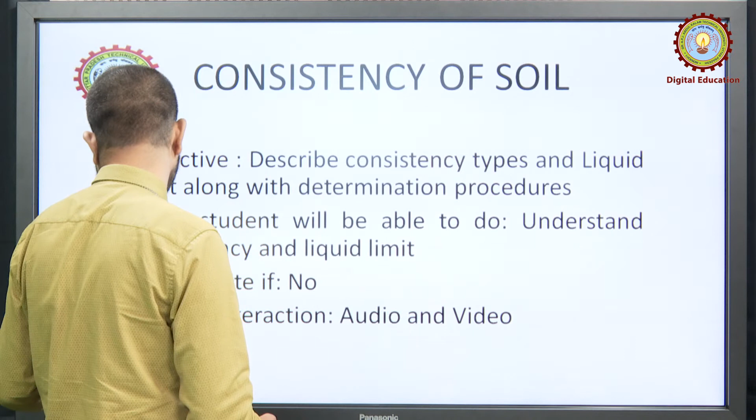Consistency of soil we will be doing today, particularly the liquid limit. What is the consistency types and all, we will be discussing today. So let us see, what is consistency of soil?

Consistency is defined as a term which is used to describe the degree of firmness of a soil in a qualitative manner, by using descriptions such as soft, medium, firm, stiff, hard. Meaning, if a soil is given to you and someone asks what is the consistency, then it means how soft or how lean or how hard the soil is, or if it is flowing like a fluid or it is very stiff.

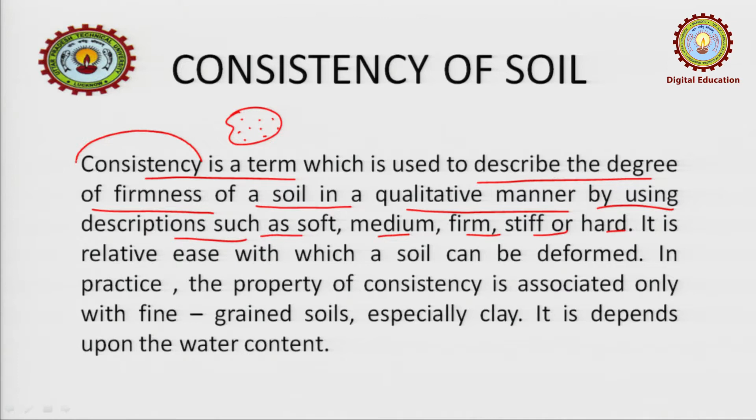You have to define that physical behavior of the soil, that is the consistency. So it is the relative ease with which a soil can be deformed. Obviously, if the soil has a high percentage of water, then it will have a liquid behavior. So liquid behavior means it will be easily deformed, it can flow as well.

In another case, suppose if the soil is stiff, what does stiff mean? Stiff means it is hard, meaning it will have a shear strength, or it will have a strength, or you have to apply some energy to break it or to deform it. So that is your consistency.

In practice, the property of consistency is associated only with fine grained soil, especially clay. It depends upon the water content. I just told you that water content is a very peculiar dependent for the consistency of soil. Besides that, the discussion for consistency is mainly for the fine grained soil.

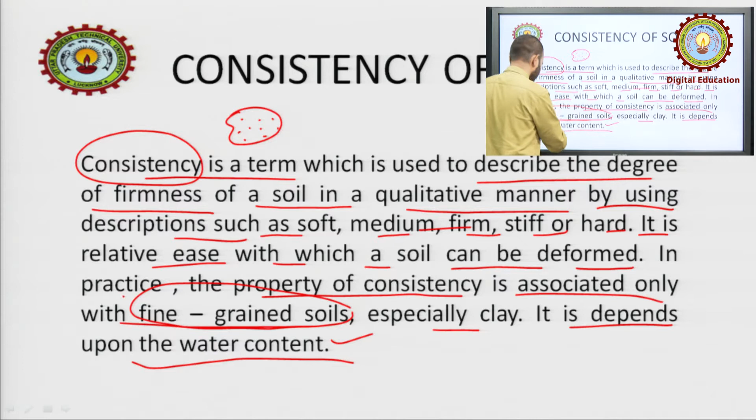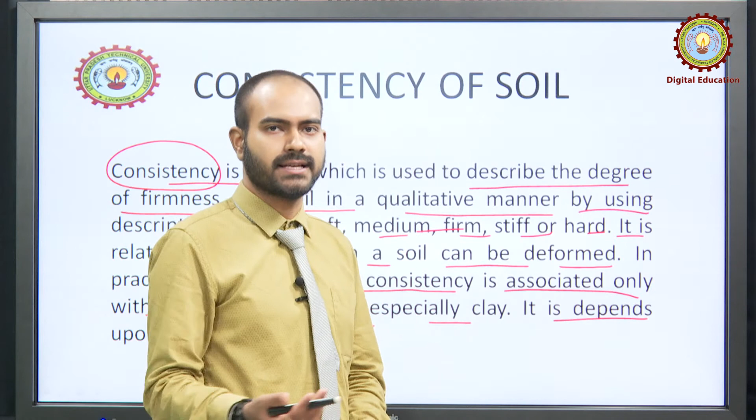Why fine grained soil? Because in coarse grain soil, such as boulders or small pebbles, they have a different property. They don't show cohesiveness or anything like that. Even though they are dry or wet, they will have their own property. They will be scattering here and there as if there is no medium, whether there is water or not, in both cases there will be no difference. So we will be mainly concerned with fine grained soil when talking about consistency.

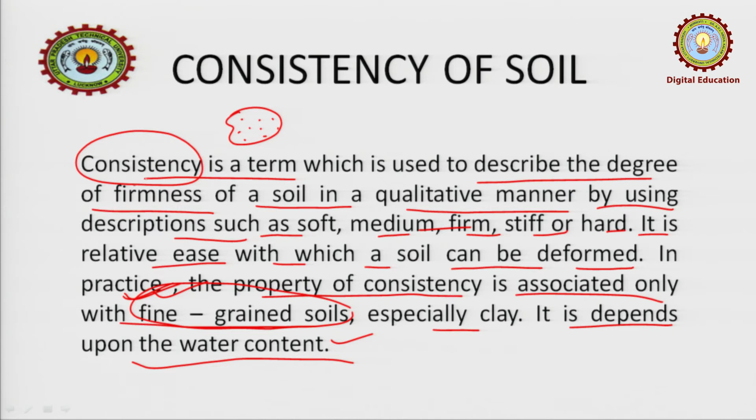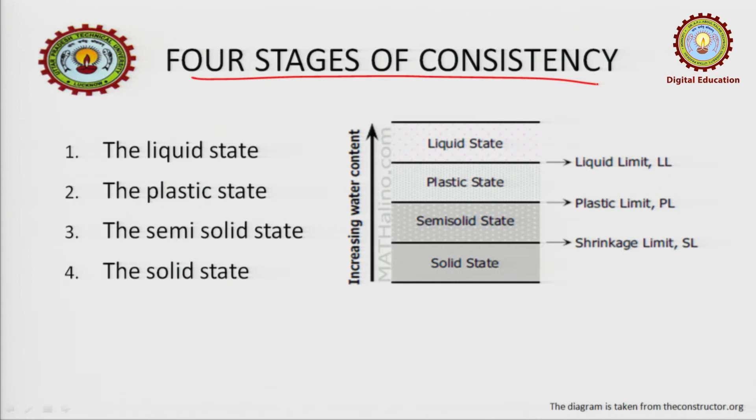Okay, let us move forward. Now, stages of consistency. This stages of consistency resembles the different parts or different stages or states of the soil which we will encounter. This was first given by Atterberg, who was a scientist. So he gave the stages of consistency.

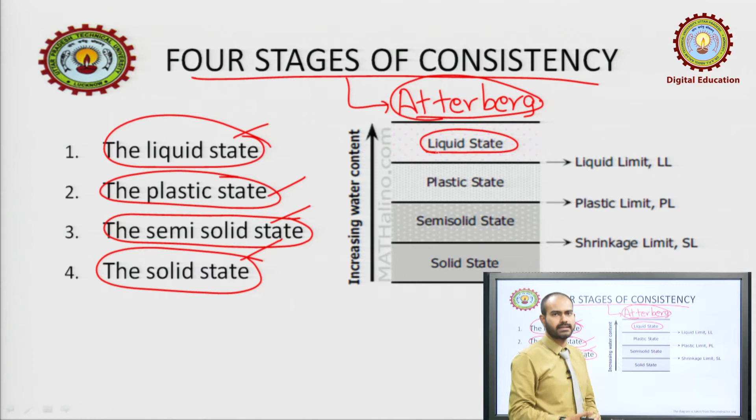He defined 4 stages for a general soil: liquid state, plastic, semi solid and solid. By name also you can judge what the liquid state is. In this diagram, you can see this is the increasing water content. In the liquid state there will be the highest percentage of water, meaning the soil will have little amount of soil particles and instead a large amount of liquid or water. This means the soil will flow, it will behave as a liquid.

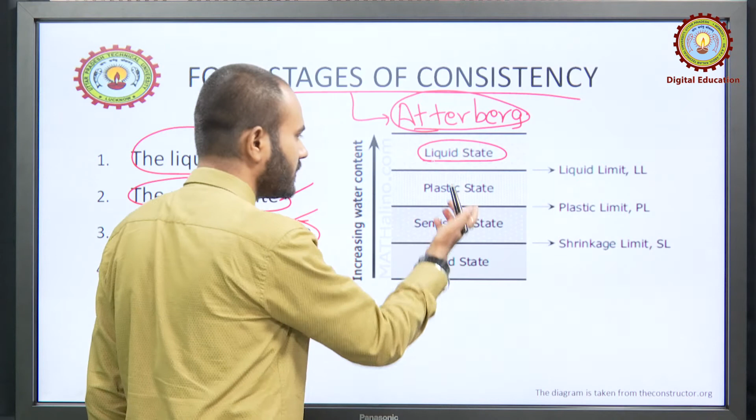Then, plastic state. What does plastic state mean? It means it is a state in which the soil can be easily deformed or can be easily molded into different types of shapes.

The liquid limit, what is this? This is actually a water content value at which the state of the soil shifts from liquid to plastic, or we can say plastic to liquid as well. This is the boundary water content.

Above this water content, it will be in a liquid state. Below this water content, it will be in a plastic state. Further, semi solid - obviously, you know what semi solid means.

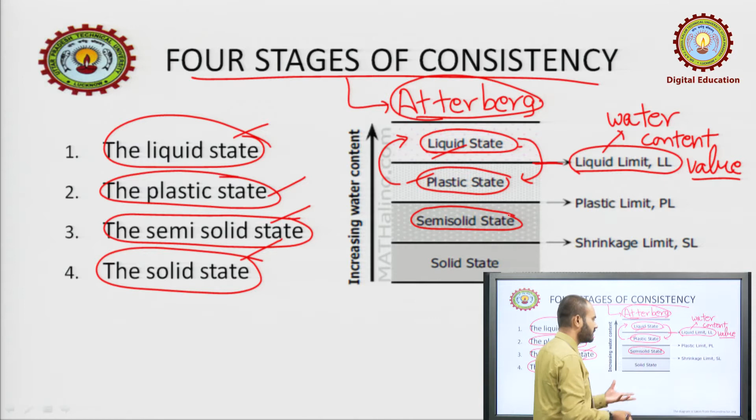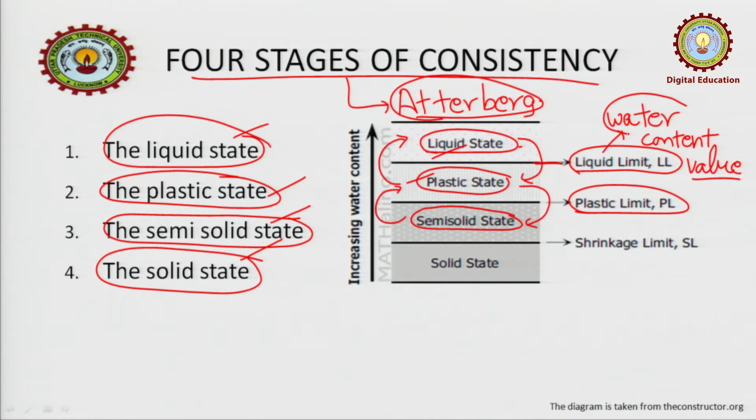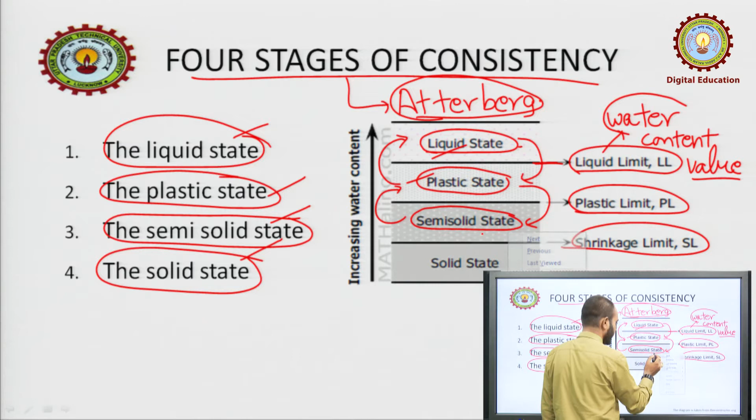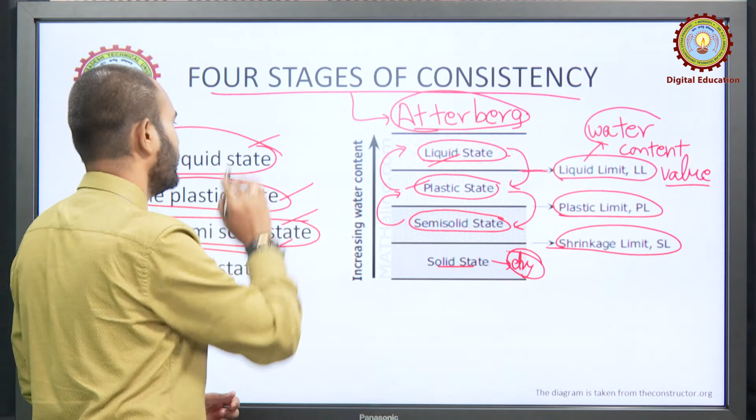It will have lesser amount of water content, so it will have more cohesiveness, more shear strength. So this is also the bifurcation between these, done by plastic limit. This is again a water content value. Above this, plastic; below this, semi solid. Again the shrinkage limit is the final water content, above which there will be semi solid, and below which this will be solid only. Solid means you can say it is a dry state nearly. So these are the bifurcations: solid, semi solid, plastic and liquid state of consistency.

Liquid state: when a fine grained soil is mixed thoroughly with a large quantity of water, the resulting suspension is in a liquid state and offers practically no resistance to flow. The soil has no shear strength.

What is shear strength now? First of all, the soil generally fails in two ways: one is settlement failure and another is shear failure. Settlement failure, by name you can understand - suppose this ground is here, building is here. If the soil settles, some part settles more and some part is not settling, then this will go down, so the failure of the building takes place.

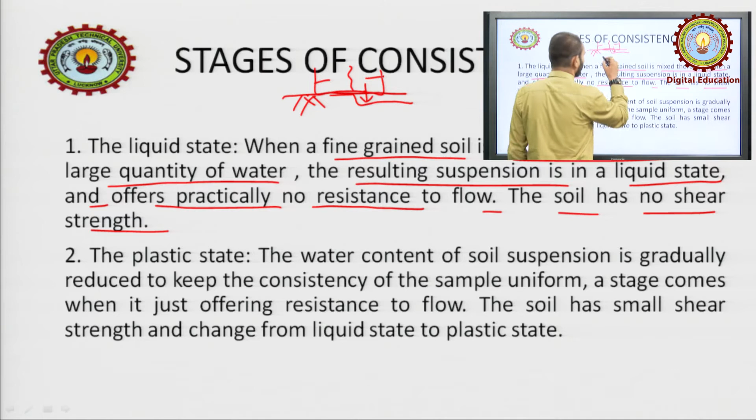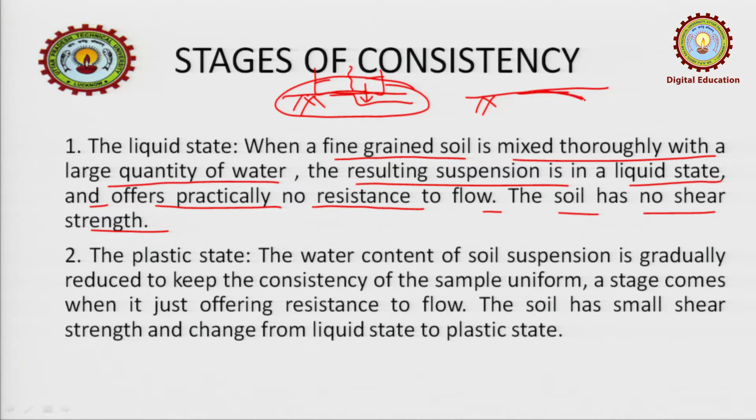The other part is shear failure. Suppose this is the land or ground. If the soil loses its shear strength, meaning the capacity to hold the load coming onto it, and fails, then that will be shear loss or shear strength loss. So in liquid state, the soil has no shear strength, meaning it cannot hold up any load applied to it - it will just move away and let the load pass through it, something like this. It has a large quantity of water, as I told you.

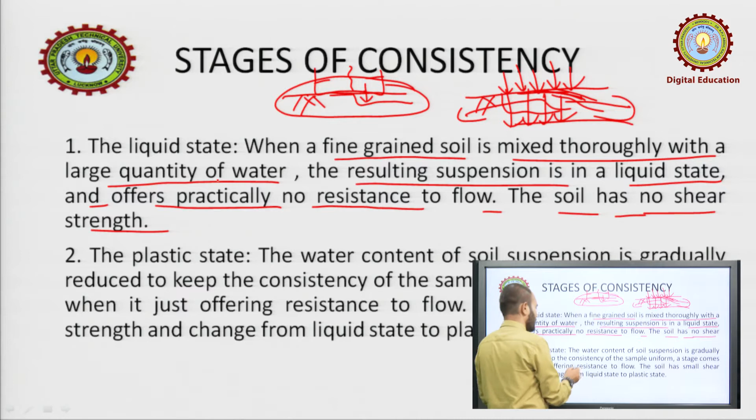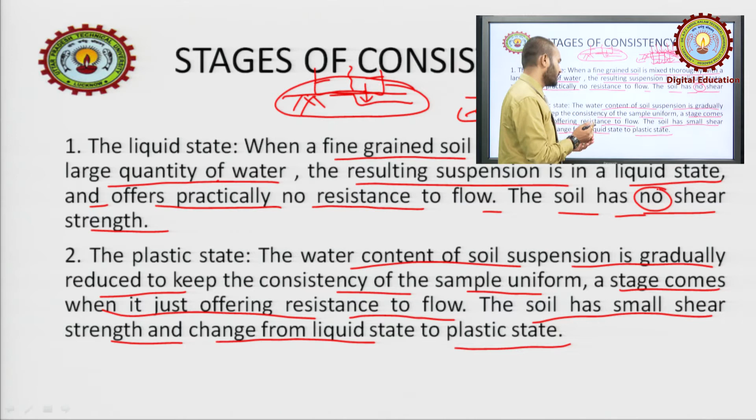Plastic state: the water content of the soil suspension is gradually reduced to keep the consistency of the sample uniform. A stage comes when it is just offering resistance to flow. The soil has small shear strength and changes from liquid state to plastic state. Meaning, as I just told you, it has no shear strength in liquid state, but in plastic state it is slowly gaining shear strength. The water content is gradually reducing and the shear strength is increasing gradually. That stage will be the plastic state.

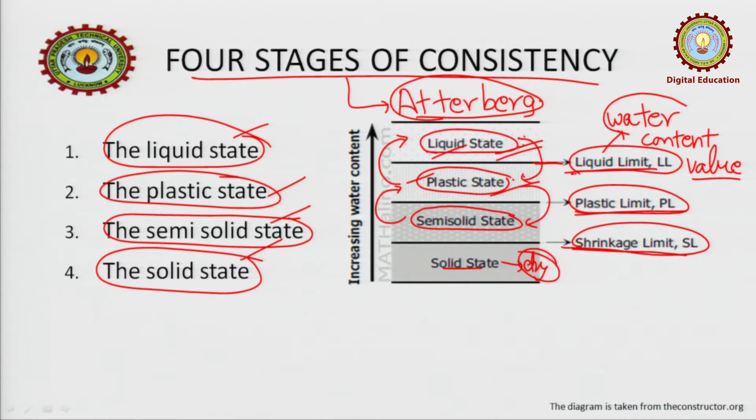Now, limits of consistency. What is limit of consistency? Just as I told you, these are the limits of consistency - this one, this and this. Why are they called limits of consistency? Because they demarcate two different types of states. Two different consistency states are demarcated or bifurcated by this limit, so they are known as the limit of consistency.

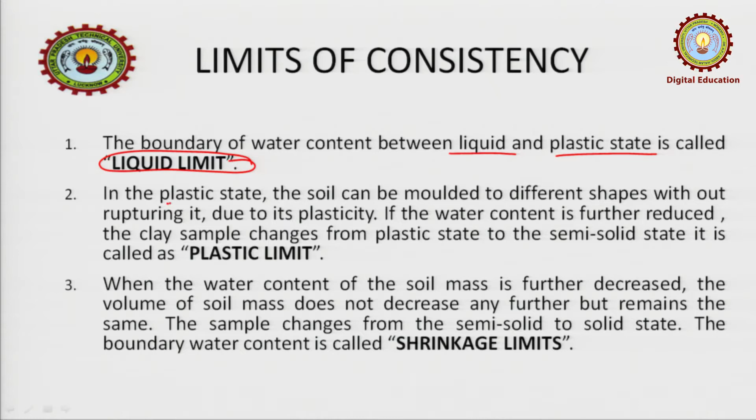The first one, obviously, if we are moving from liquid to plastic, that is the liquid limit. In the plastic state, the soil can be molded to different shapes without rupturing, due to its plasticity. If water content is further reduced, the clay sample changes from plastic state to semi solid state - this is the plastic limit, meaning the water content which divides plastic from semi solid. Here in plastic state there will be lesser shear strength; in semi solid state the shear strength will be comparatively higher.

Then, when the water content of the soil mass is further decreased, the volume of the soil mass does not decrease any further but remains the same. The sample changes from semi solid to solid state - this is the shrinkage limit. For now, just understand that from semi solid to solid state, the water content at that point is the shrinkage limit. This part I will explain now in the diagram.

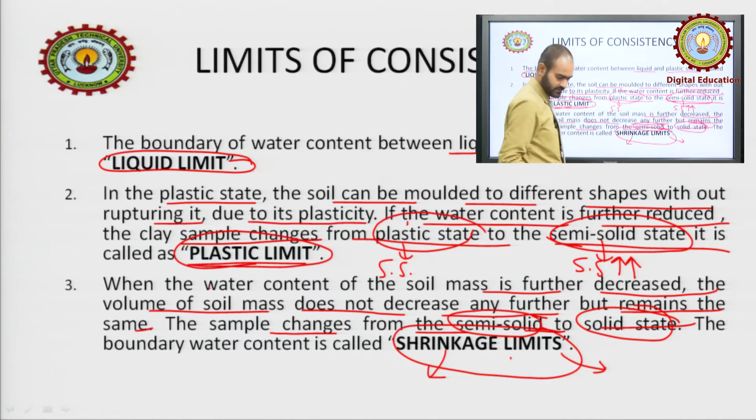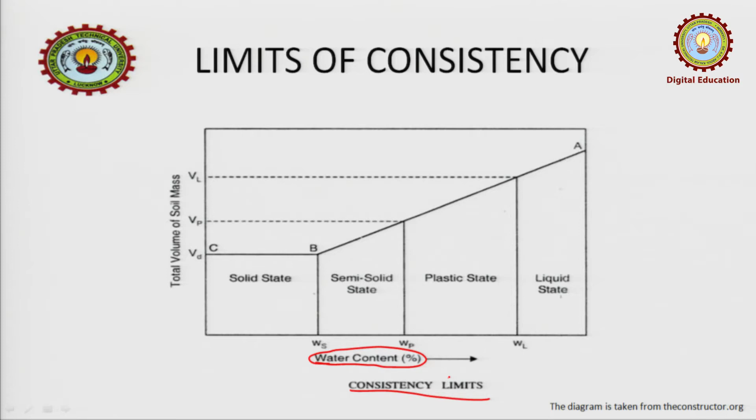Now this is the diagram - the main or final diagram from which you can understand every concept for the consistency limits. Let us see. First of all, the diagram is between two things: one is the y axis and another is the x axis. What is in the x axis? That is the water content, or you can say consistency limits. And what is in the y axis? The total volume of soil.

Here you can see this is the liquid state. Why is it here at the end? Because it will be having the highest water content. This is having the highest water content, so it is here. It will be moving on further.

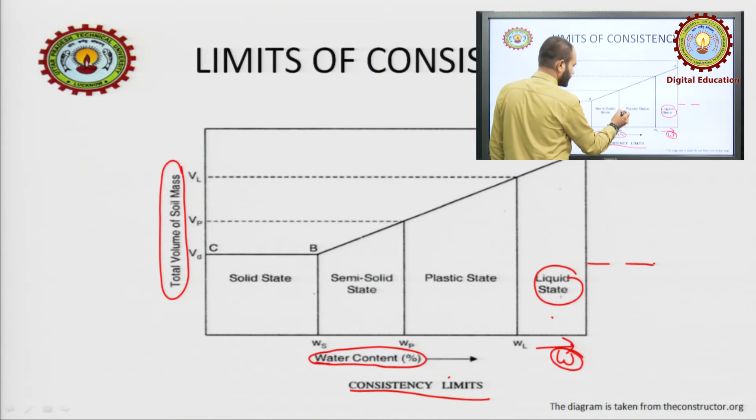After that, just lesser than this, we have the plastic state. Then semi-solid and then solid. This is the one having very less water content, and zero is also considered into this. What is this? This is the liquid limit which we were just talking about. This is the plastic limit and this is the shrinkage limit.

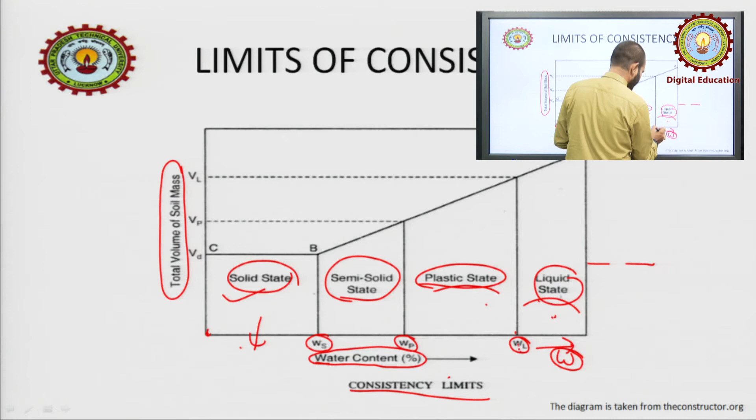We can see this state and this state, meaning the plastic state and liquid state, are being demarcated or bifurcated by this. This is your moisture content or water content. At this place, which is the liquid limit, is the demarcating point. Here again plastic, here again shrinkage.

Now you can see one thing, that I just told you that the volume decrement gets to constant. What does this mean? You can see the graph going something like this. This means that after the shrinkage limit, after the water content named shrinkage limit, or the demarcation between them, the volume continuously increases.

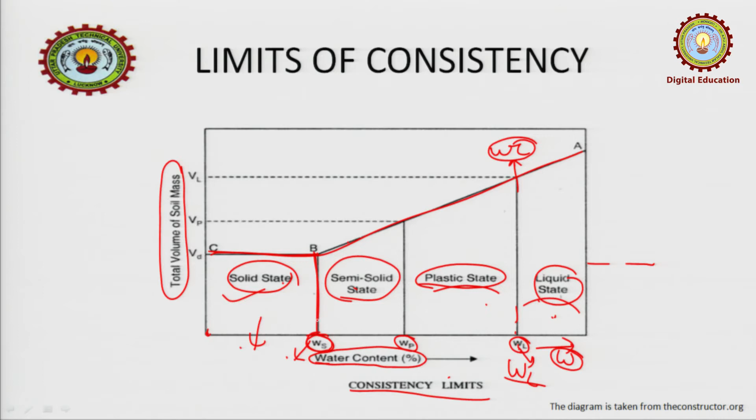Why? Because at this place, the soil will be fully saturated. This is the main part. You have to understand that this soil will be fully saturated at this point.

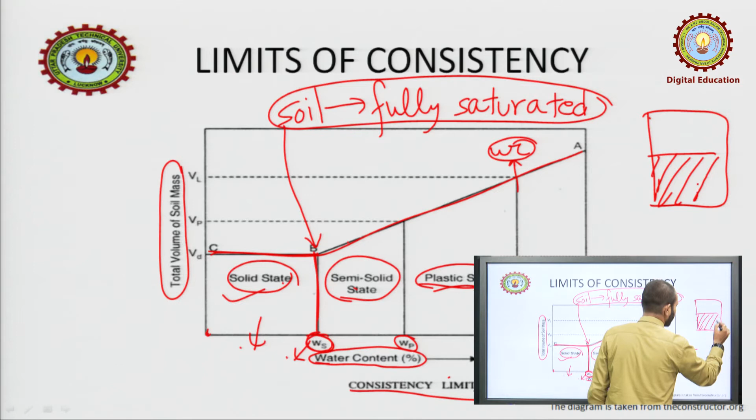What does fully saturated mean? If you remember the three-phase diagram, this was the soil, suppose, and here only water will be there. All the voids will be filled with water only. So this was the fully saturated condition, where all the voids are filled with water.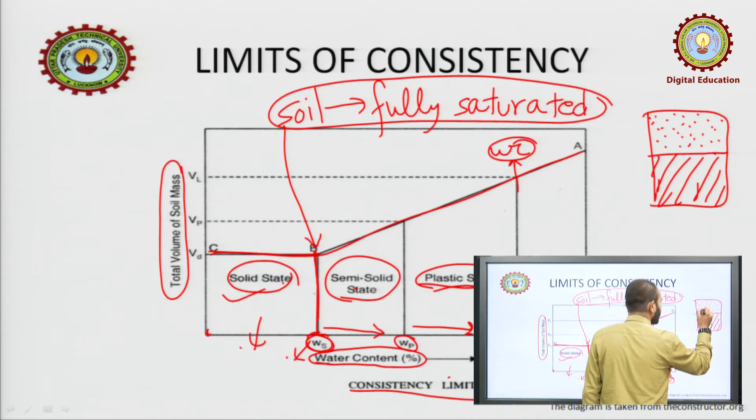Now if you further increase the water content in the soil, what will happen? It will increase the water content. This is constant, we are not adding any soil, we are adding water. Something like this. Due to this, the volume is getting increased.

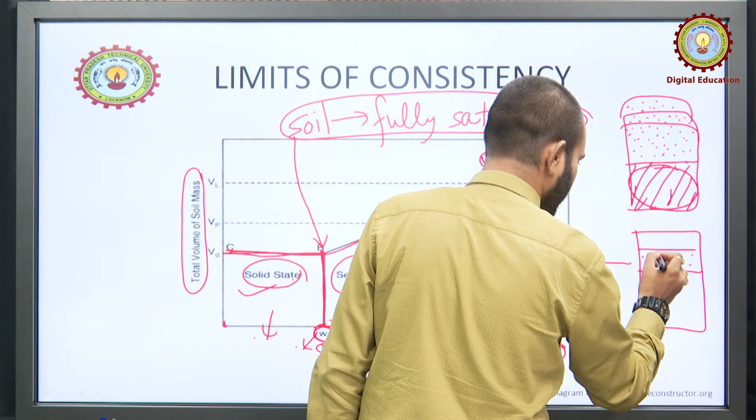Now I think you have understood this, and why the volume gets constant after this, because here the soil was fully saturated. Even though the volume of the soil will remain constant, even if we decrease this water, perhaps water can be only this much, from that same volume, then this is soil already, it's constant.

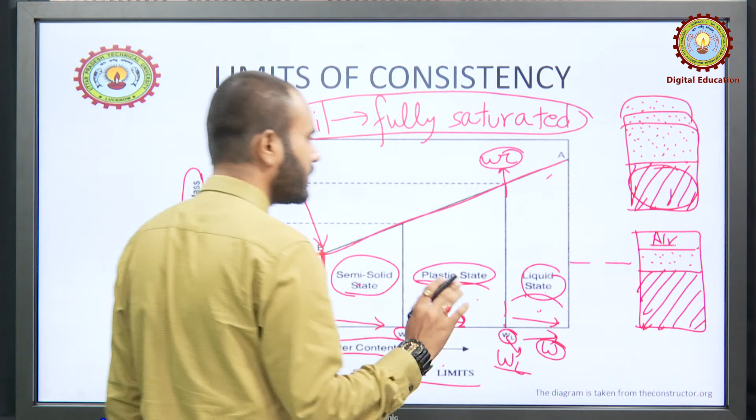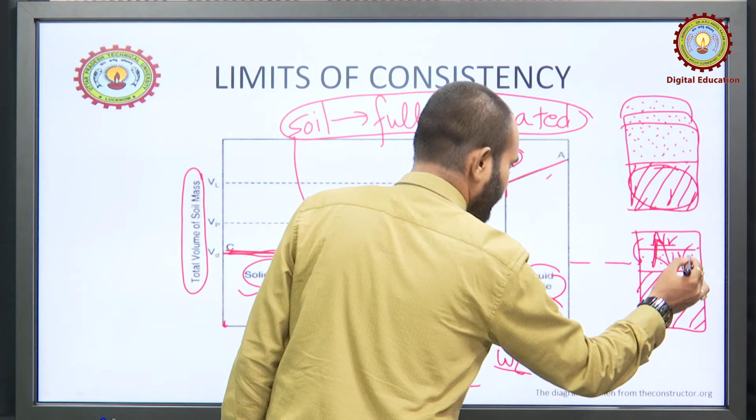We have reduced the water. Here what will happen? Air will come in this place, and the volume will not reduce. So volume now gets constant, and slowly as we reduce the water, the whole part will become air. So this place is the fully dry condition. I think you have understood this part.

So let us move forward. Just understand this diagram very well, so that you can get the clear concept of what is WS and why the volume after this does not change. This is an important part.

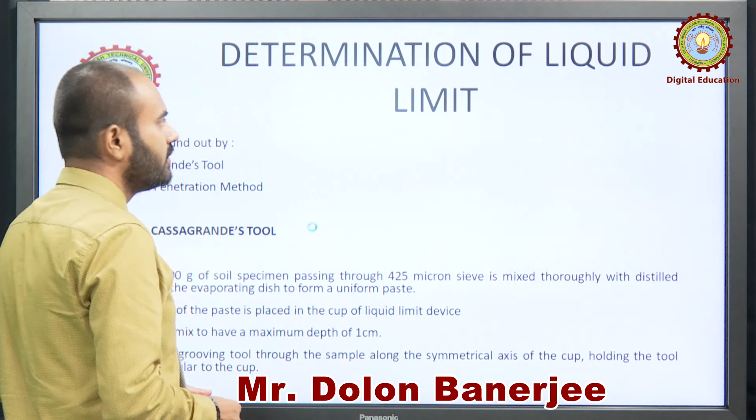Now let us see what is liquid limit determination, how we determine the liquid limit. This part is the liquid limit. We will now see how it is determined mainly in the laboratory, using the Casagrande tool method and the cone penetration method.

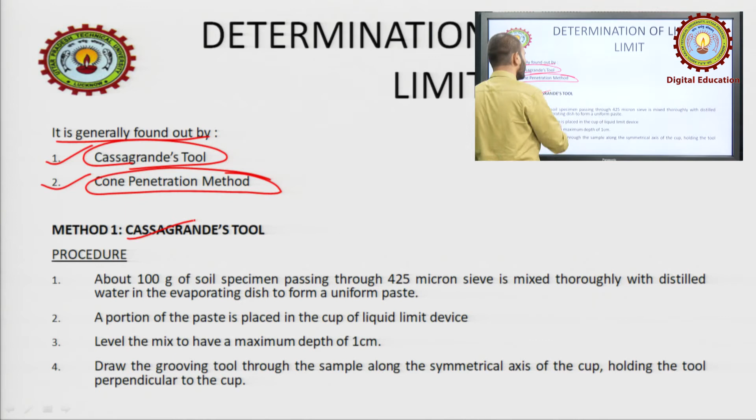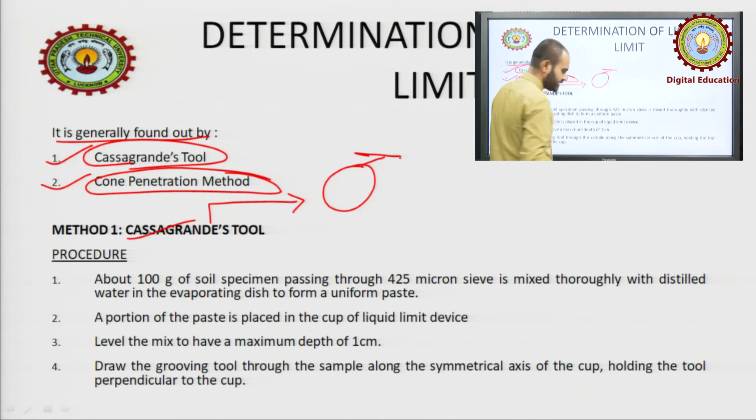It will go 1 centimeter up and again fall down, 1 centimeter up, again fall down, once you start revolving this handle. So what will happen? Once this is a hard surface, hard rubber base, so once you start hitting it, this will move up and fall down.

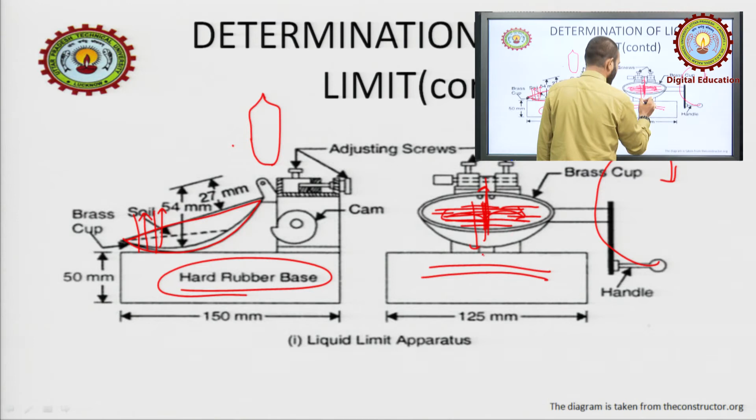So the soil will come closer, again come closer. It will continue to come closer till they again meet and form like a single body, you can say. So that much blows, the number of blows is counted here. What is the number of blows? How many times it is struck here? This is the general idea.

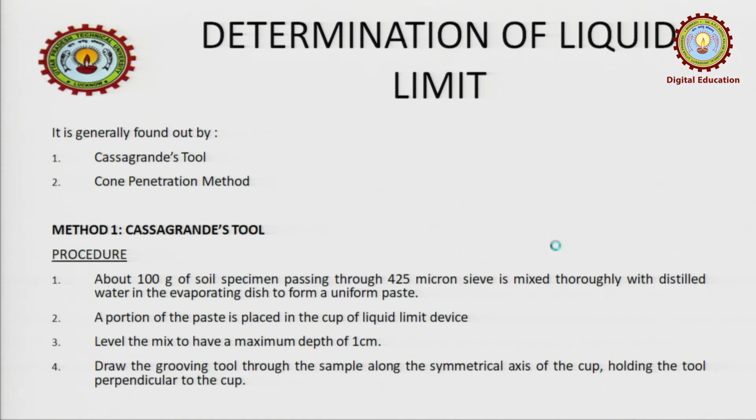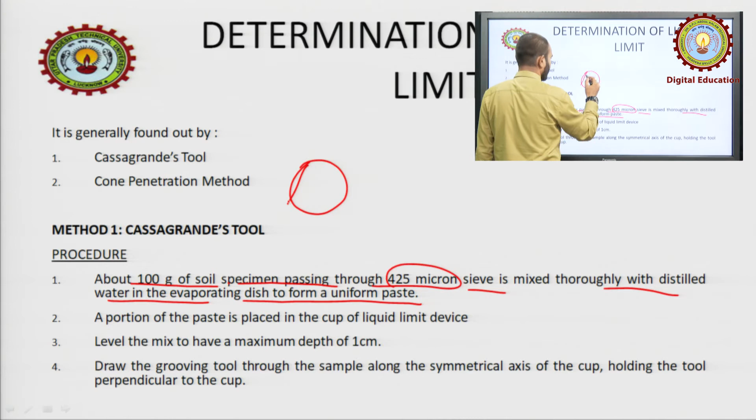Now let us see. Take about 100 gram of soil specimen passing through 425 micron sieve. Mix thoroughly with distilled water in an evaporating dish to form a uniform paste. Means just take soil, add water and make a paste.

A portion of the paste is placed in the cup of the liquid limit device. I was telling the same. This is the liquid limit device, means the Casagrande device. This is the Casagrande device, means this one. Here we will now be placing the soil.

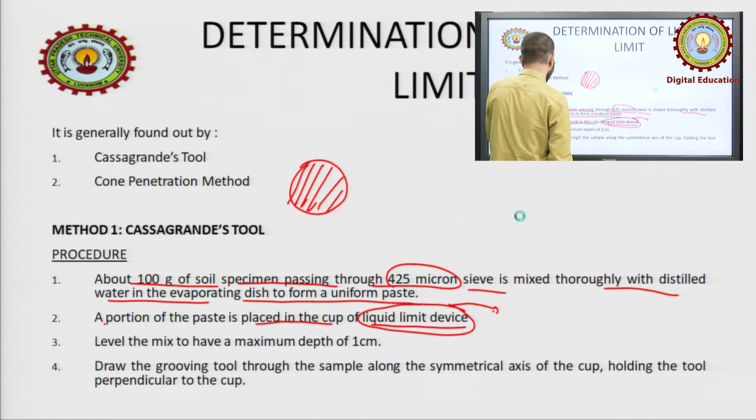Level the mix to have a maximum depth of 1 centimeter. Means inside this also we have to maintain the depth only 1 centimeter, only 1 centimeter. The depth of the soil.

Then draw the grooving tool through the sample along the symmetrical axis of the cup, holding the tool perpendicular to the cup. As I told you, we will be cutting it like this, taking this and cutting it like this.

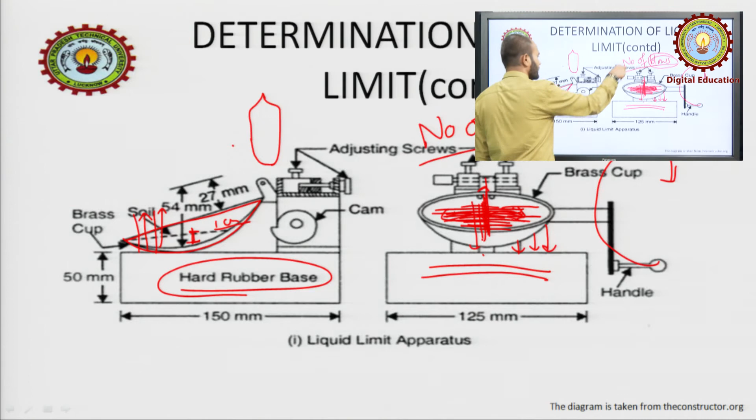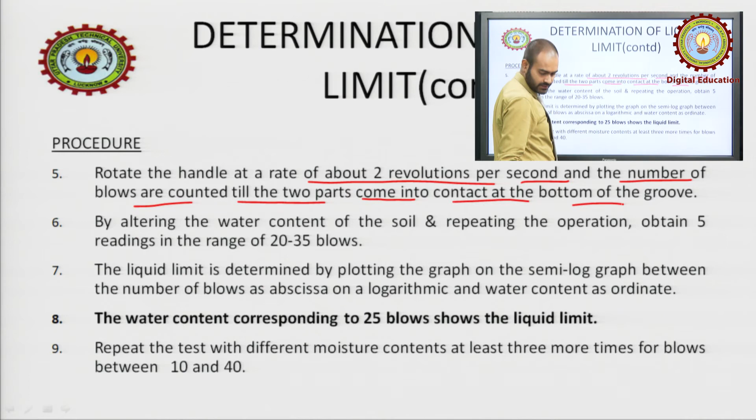Now rotate the handle at about 2 revolutions per second and the number of blows are counted till 2 parts come together. As I told you, we will just start revolving it like this and it will go up and fall down, again go up, again fall down. So this will make, it is generally 1 centimeter. The height of rise is generally 1 centimeter, meaning it will fall from 1 centimeter height on this hard rubber base. So how much number of blows do we require to again get it in the initial position?

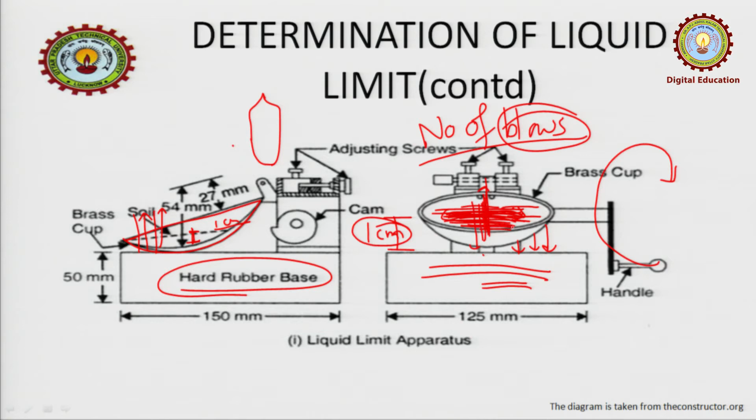We have to note it down. So what we will do, we will alter the water content and repeat the operations, obtaining readings in the range of 20 to 30 blows, 35 blows.

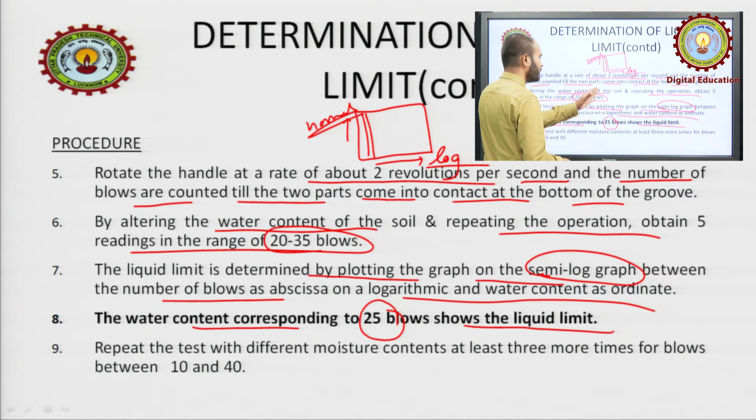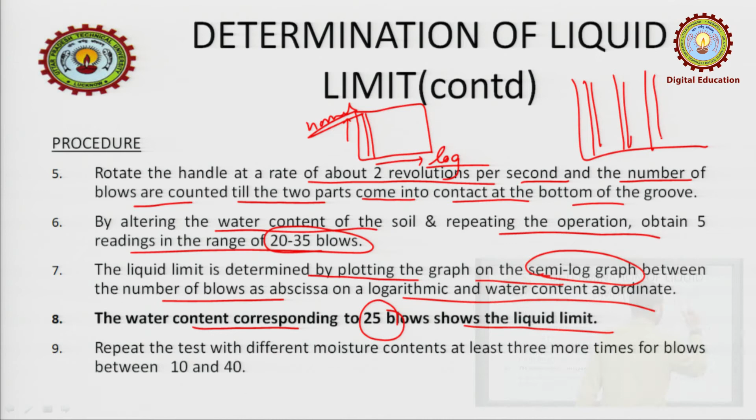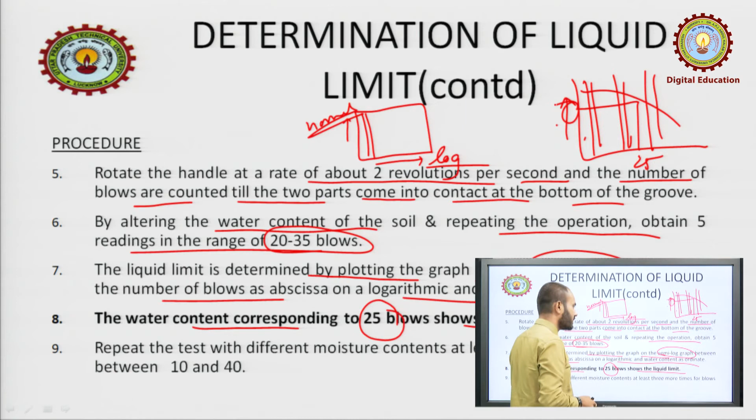Generally the water content corresponding to 25 number of blows shows the liquid limit. What we will do, we will have a number of experiments and a number of blows, and we will plot it. Suppose this is the log graph, something like this. This is the water content, and once we increase the water content, the number of blows will decrease. So something like this. Then according to 25 number of blows, we will find out what is the water content. This will be the liquid limit. This will give you the liquid limit.

This is what the experiment was.

Now let us see something about the liquid limit, how and what is being done in the graph. We will be talking about the graph. Liquid limit is determined by plotting the flow curve on a semi-log graph with number of blows as abscissa on log scale and water content on ordinate. Best fit straight line is plotted.

As I told you, in semi-log, remember the log scale is on the x-axis. This one is having the log scale and this is having a normal scale. Here we will be having the water content, and here we will be having the number of blows, represented by n.

So hence we got this formula. What is flow index? It's the slope of the flow curve, which shows the relationship between the number of blows on the x-axis on a log scale, and water content on the y-axis on an arithmetic scale, in the liquid limit test. So this is your flow index.

Here what is happening? Suppose like this: corresponding to one water content we have n1, and again we have n2. This is w1, this is w2, this is n1, this is n2. Remember this is log scale. So what will be the formula? W2 minus W1 upon log of n2 by n1. I think you have understood how this came. This is actually log of n2 minus log of n1, which can also be written this way.

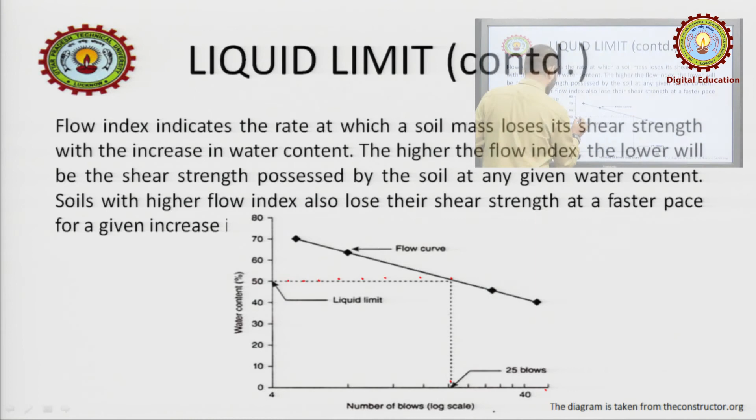Now here you can see this is the graph, the number of blows on the log scale, and against 25 number of blows they are finding the liquid limit. So this becomes the liquid limit for the experiment.

Flow index indicates the rate at which the soil mass loses its shear strength. What happens is, if your flow curve becomes steeper, even though you change a little, suppose here was 10%, now you do it 5%. What will happen? This is n1, this is n2, not a huge difference will be coming. But in this case, if you take from 20 to suppose 15, you can see how much difference in the number of blows is coming. This is the actual use of the flow curve graph.

Flow index indicates the rate at which the soil mass loses its shear strength with increase in water content. Higher the flow index, lower will be the shear strength possessed by the soil at any given water content. Soils with higher flow index also lose their shear strength at a faster rate. What does this mean?

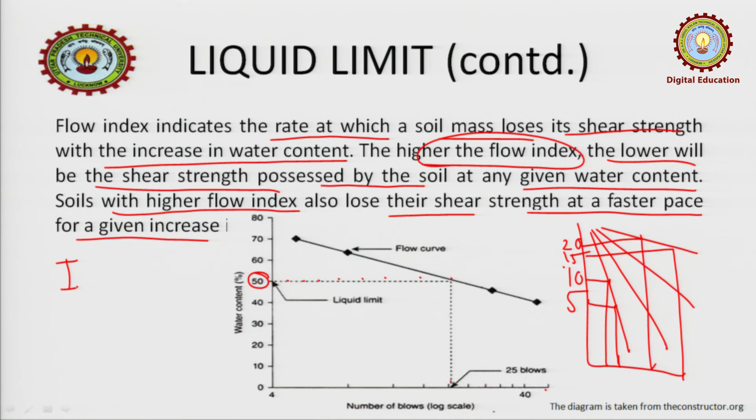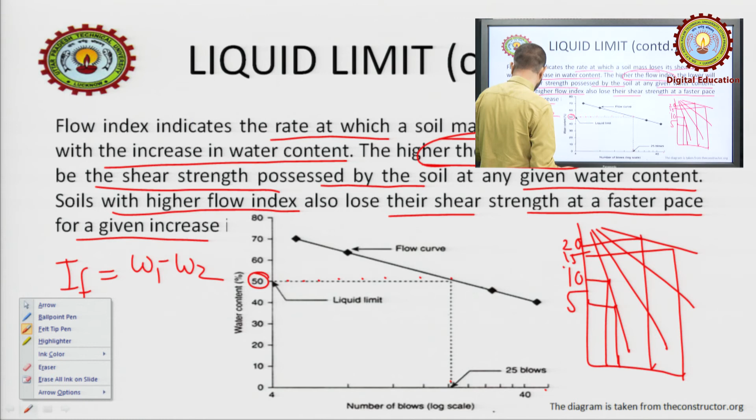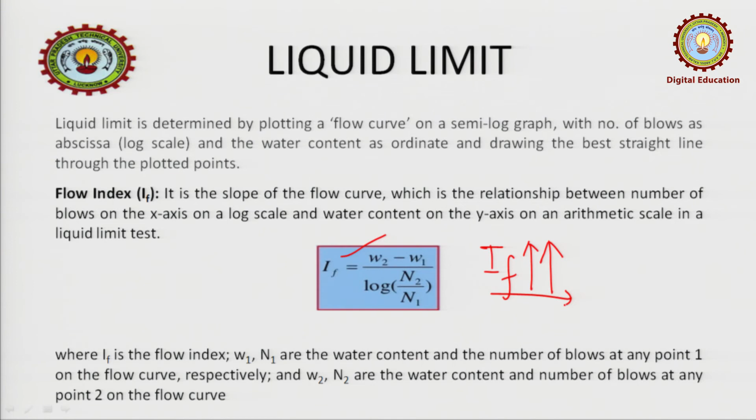What was the formula for flow index? W2 minus W1. Let's see in this only. This was the formula for flow index. Now here what they are saying is, if If is higher in value, this means the soil will lose shear strength quickly, or we can say it will possess lower shear strength. How does this mean? Because once this value is higher, this means what?

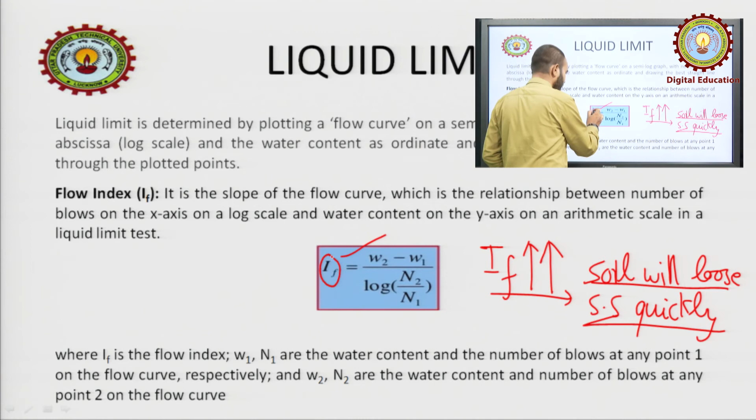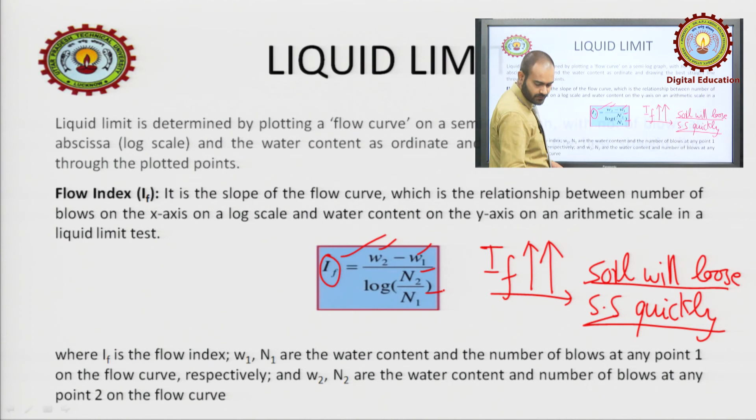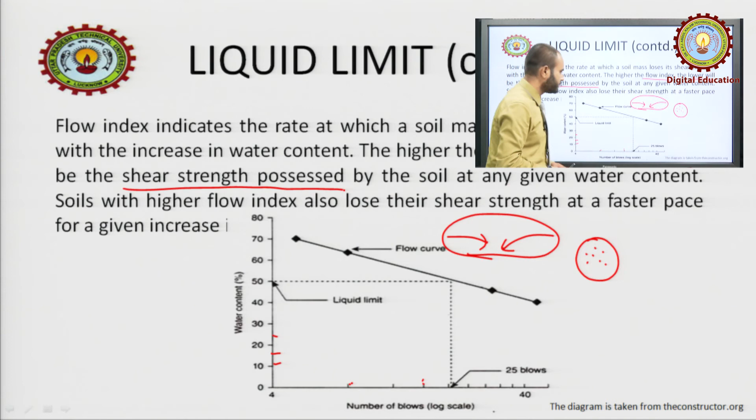This is lower and these are higher. These being higher means the number of blows required is very high. So what does this mean? That the soil is in a dense condition, at low water contents very high number of blows is being required. So this means higher flow index, lower will be the shear strength possessed. Now let's see further.

First of all, it will be hanged, controlled hang will be done first. Then for 5 seconds we will leave it, meaning we will release it. So due to its weight, it will be penetrating inside. We will see how much penetration has occurred, and according to that we will be demarcating the liquid limit.

Generally, penetration corresponding to 20 mm is seen, meaning if this cone penetrates 20 mm into the specimen, then the water content of the soil in this case will give you the liquid limit. Let us move forward.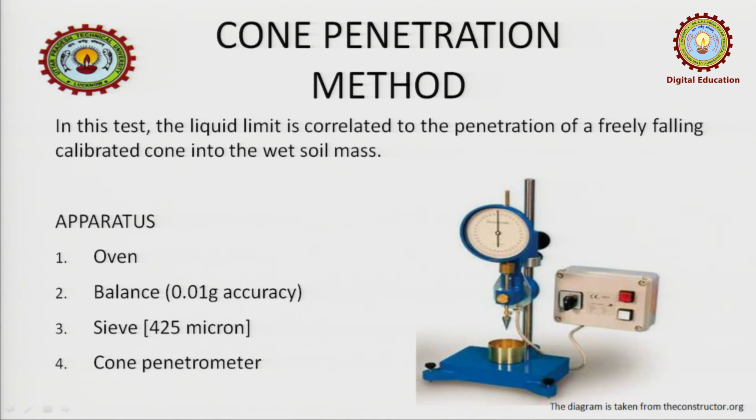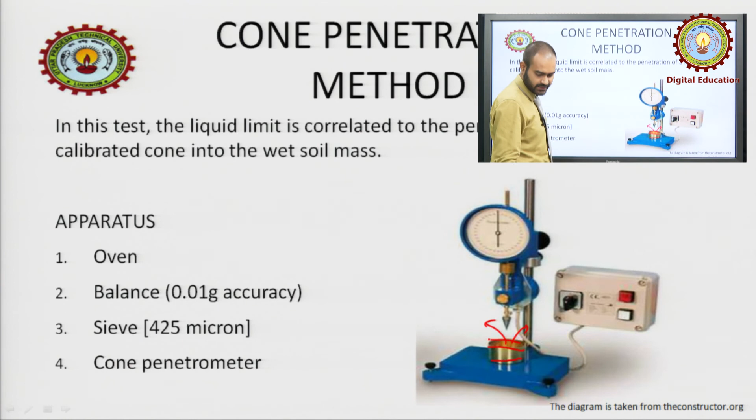Then the wet soil paste is transferred to the cylindrical cup of the cone penetrometer apparatus, ensuring that no air is entrapped. Let me show you with the diagram. We transfer the soil into this cup, and to ensure there are no air voids, we fill it in layers. Fill a part of it, pat it on the ground so it settles down nicely and all the air voids are released. Take another part and do the same again, and again take another part and repeat. This makes it dense and without any air voids, ensuring no entrapped air in the process.

Finally, the wet soil is leveled up to the top of the cup and placed on the base of the cone penetrometer apparatus. If after placing the soil there is a bulge, suppose the soil is like this, we strike it off, removing this much part, so we get the proper level soil. Now this soil is put in the apparatus, in this place.

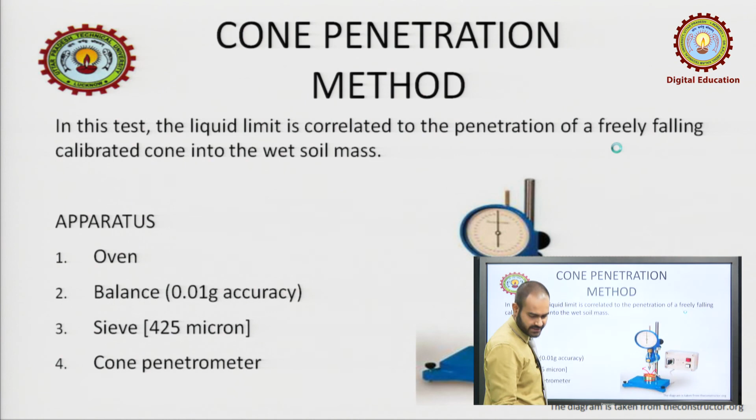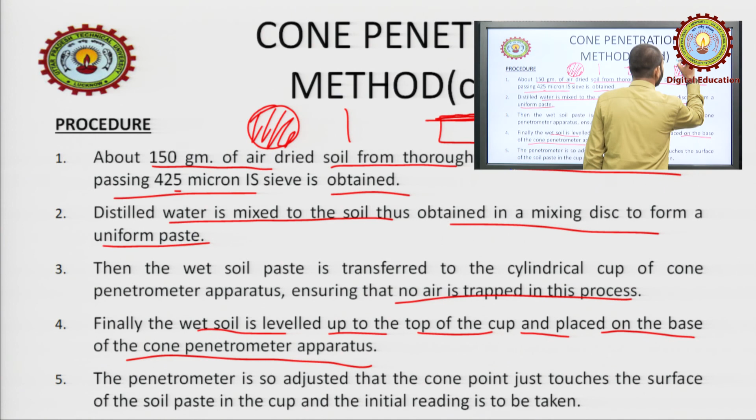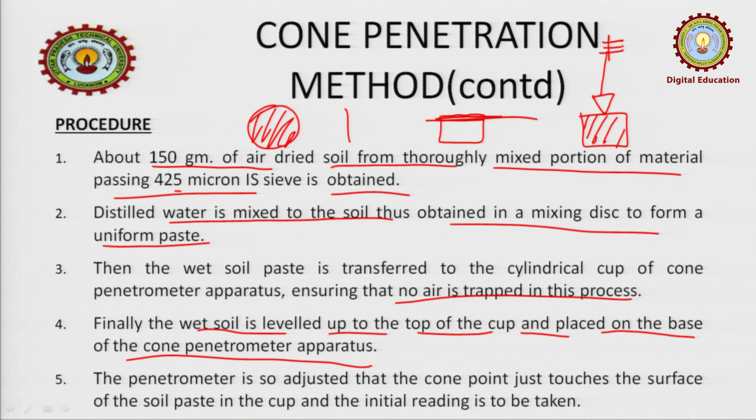Now the penetrometer is adjusted so that the cone point just touches the surface of the soil paste in the cup, and the initial reading is taken. The cone is kept or put on the surface of the soil, and then we take the reading here first.

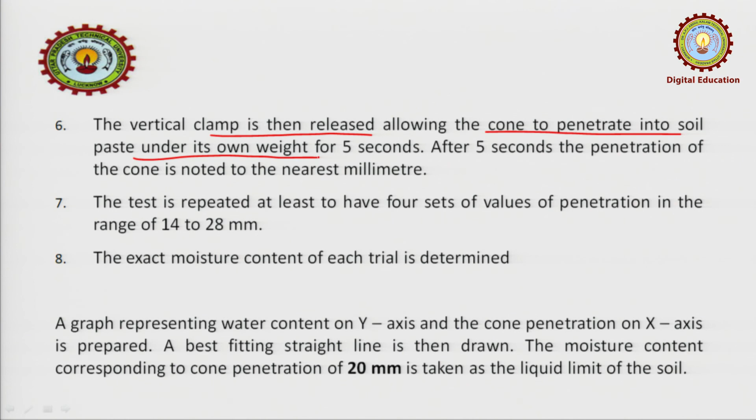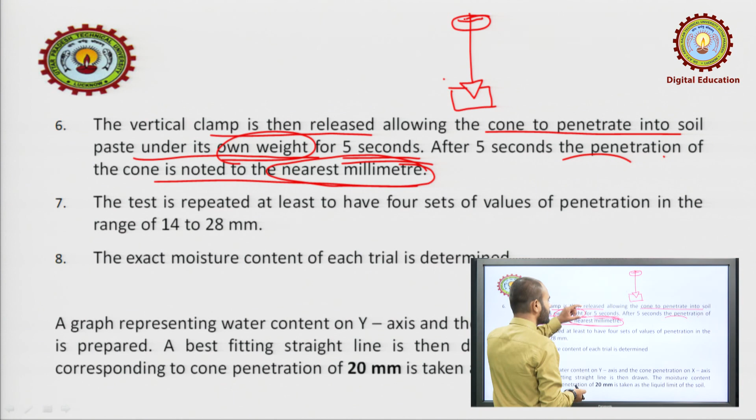The vertical clamp is then released, allowing the cone to penetrate into the soil under its own weight for 5 seconds. After 5 seconds, the penetration of the cone is noted to the nearest millimeter. We have taken the initial reading, and now we take the final reading after some time. Suppose it will be like this after 5 seconds, so again we take the reading here. Now the difference between those two values gives you the penetration value.

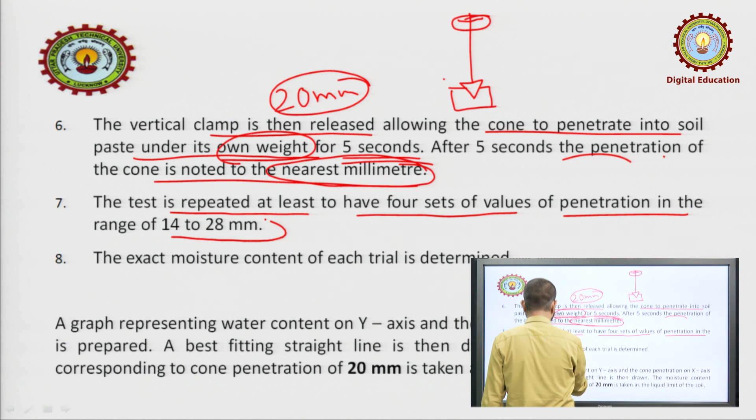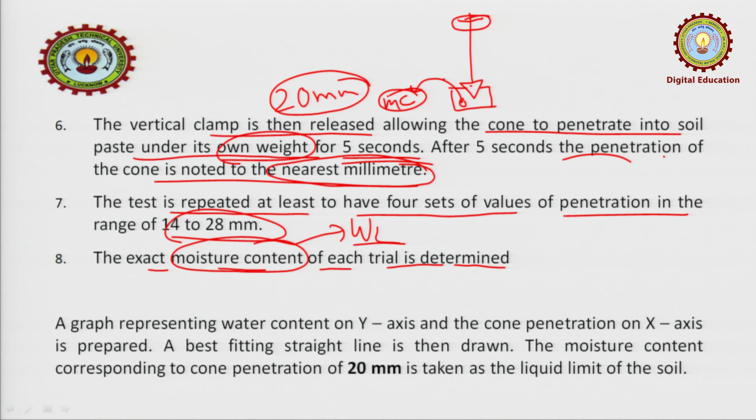This test is repeated at least 4 times to get the penetration value, and the exact moisture content of each trial is determined. Why? Because this moisture content is what we intend to find—this is the liquid limit. So once we do the experiment, we take a part of the soil and find its moisture content. We continue this process, and then a graph representing water content on the y-axis and cone penetration on the x-axis is prepared.

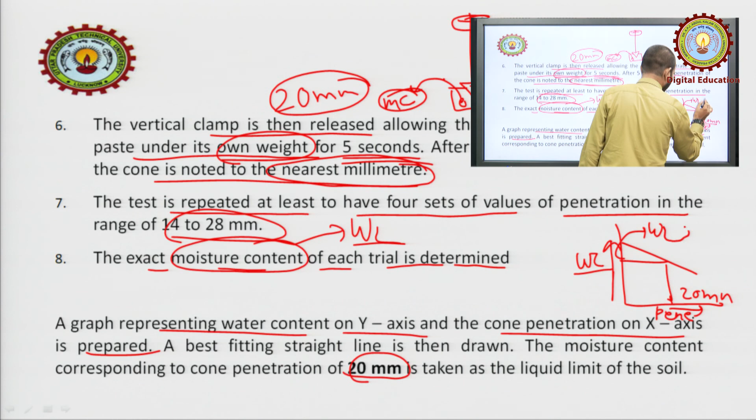So here penetration will be on one axis, and here we will have the water content—the graph is plotted like this. Corresponding to 20 mm, we find out the water content. Suppose here is the graph, and 20 mm is here, so corresponding to this we find out what is the WL, or liquid limit. This is how the penetrometer or cone penetration method works.

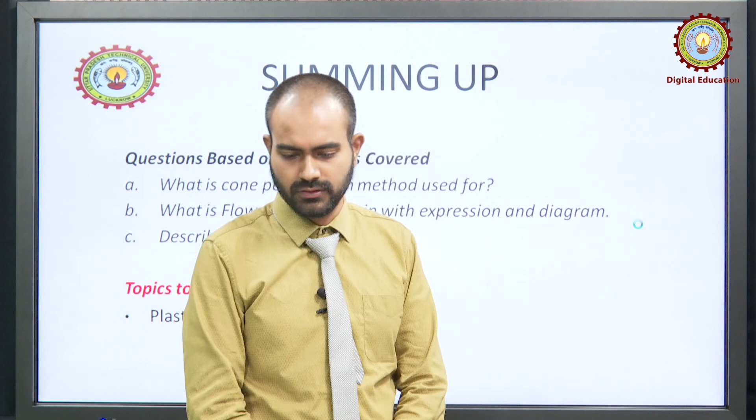So that was it. Now refer to the question: what is the penetration method used for, what is the flow index—if you remember, I told you—and liquid limit, what is the liquid limit?